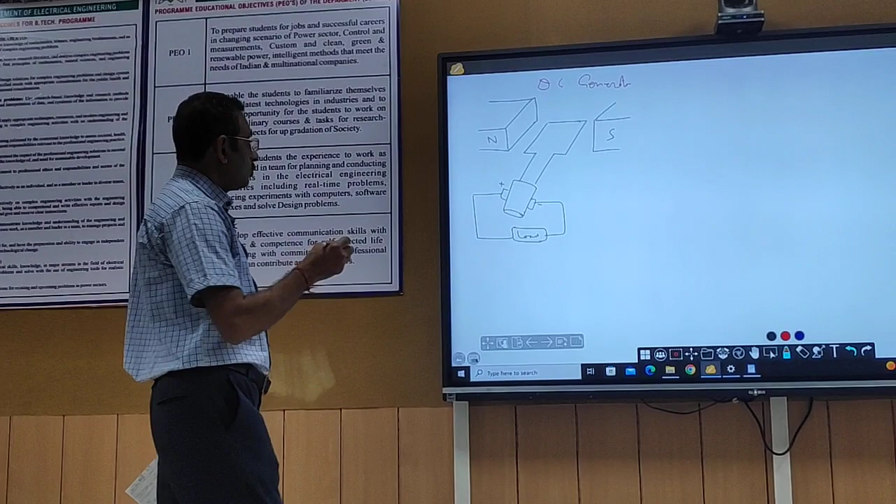In a transformer, change of flux takes place because of the nature of the supply. But here, change of flux takes place because of the rotation, mechanical involvement. So here, say there is a shaft. This is a shaft. On the shaft, this armature is rotating. Because of the rotation of this shaft, change of flux takes place.

This is a coil. In principle, we are saying this is one coil. This coil is like this. Here, this is a coil, one complete. There may be a number of turns, not only one turn. Say there are 10 turns like this, and two terminals are taken out.

So here, this is a north. Since it is a principle, we have shown North Pole and South Pole. The North Pole may be a permanent magnet. This can be an electromagnet. But anyway, when we see the construction, we will understand it in detail.

But just to understand the principle, let us say these are the two magnets, North Pole and South Pole, like this. This is North Pole, this is South Pole, and in this North Pole and South Pole, this coil is rotating. This coil is rotating like this.

So say it is a North Pole, it is a South Pole, and how much flux will be passing in this? See, this is a core like this. On this boundary there is a winding. Say this is a North Pole, and this is a South Pole. How much flux is passing into this? Some flux. Now like this, how much flux is passing through this? Zero. Which means maximum, minimum, maximum, minimum. So there is a rate of change of flux.

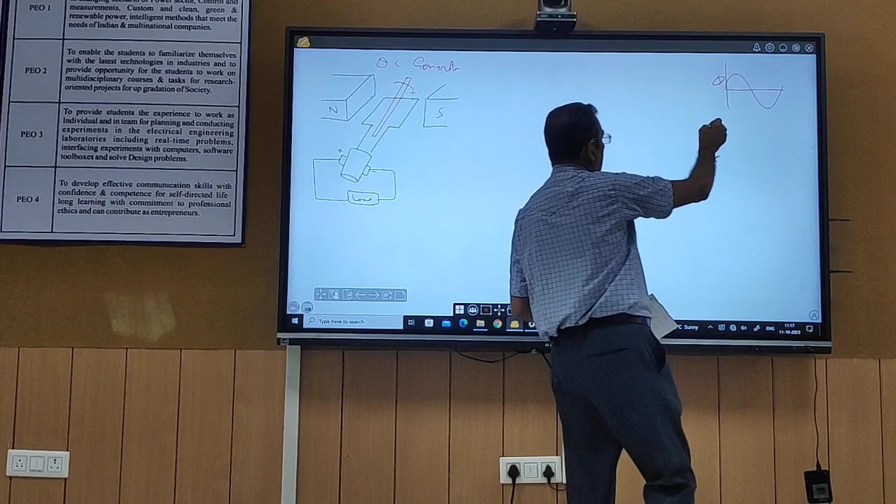If we write the equation for this flux, phi will be equal to phi m sin omega t. It is a flux. Now, how much induced EMF will be produced in this core, North Pole and South Pole, and it is rotating? At what speed is it rotating? Angular speed omega. Omega is the angular speed of rotation. So what will be the induced EMF?

How much will the induced EMF be? Rate of change of flux, d phi over dt. Okay? If it is one turn, d phi over dt; if the number of turns is n, then n d phi over dt. Let it be only one turn, so phi m sin omega t. What will the differentiation of sin omega t be? Cos omega t into omega. This much EMF will be produced.

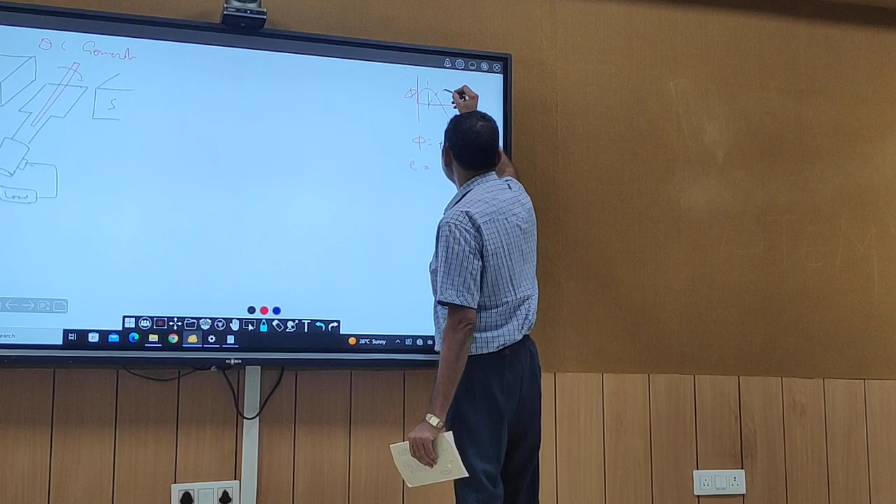So what does this mean? If phi is like this, sin omega t, then E is cos omega t, which means E will be 90 degrees out of phase. Is this one clear? So the EMF produced in the coil will be this. Now the same thing holds here.

Now you see, when this coil is rotating, as I told, this coil is like this. In this position, the flux passing is maximum. In this position, the flux passing is zero, and we are talking about induced EMF, which is d phi over dt, the rate of change of flux.

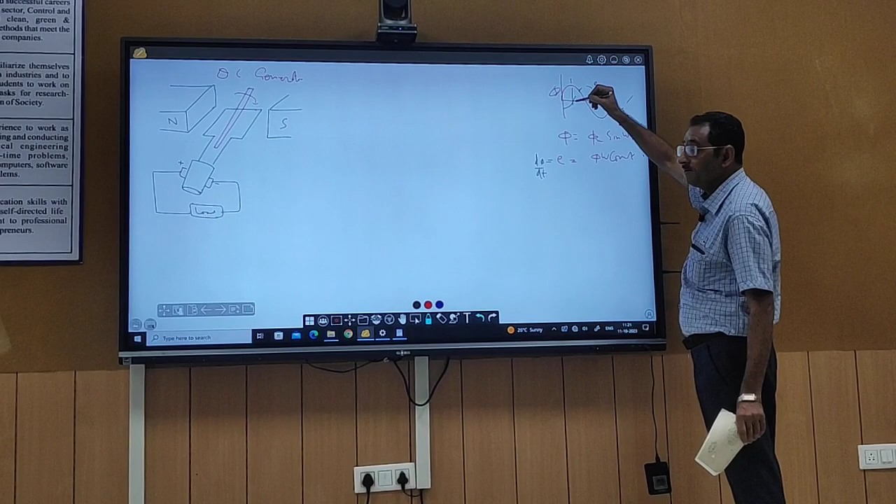So here, when the flux is maximum, EMF is minimum. Flux is minimum, EMF is maximum. Getting this point or not?

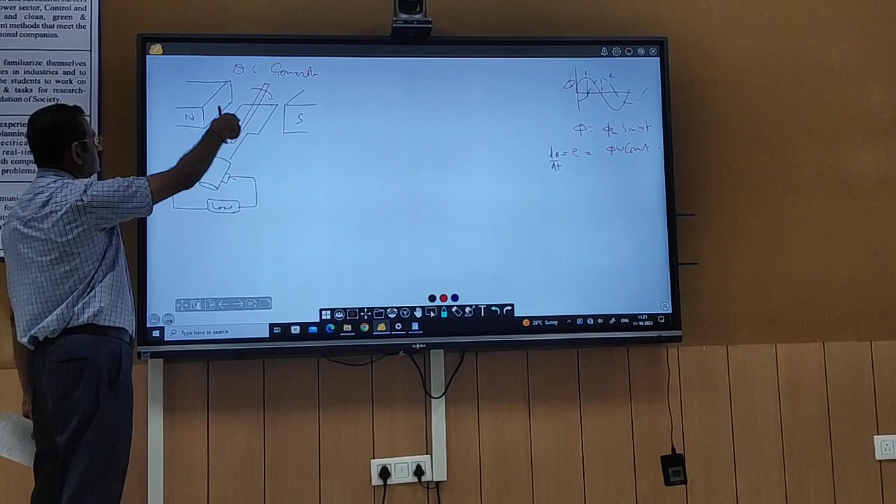Is this point clear? So here now you see, suppose in this position, when it is rotating with the help of this shaft, then the EMF will be produced. Now because of EMF, if load is connected, what will happen? Current will flow. What will be the direction of current?

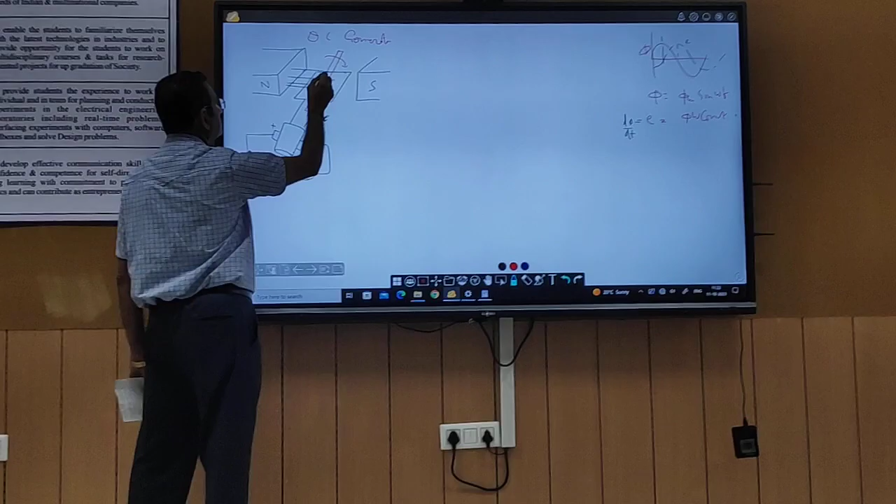Say this is the direction of field. Okay, this is the direction of flux. And this is the direction of rotation. Means when it is rotating, this is the direction of force.

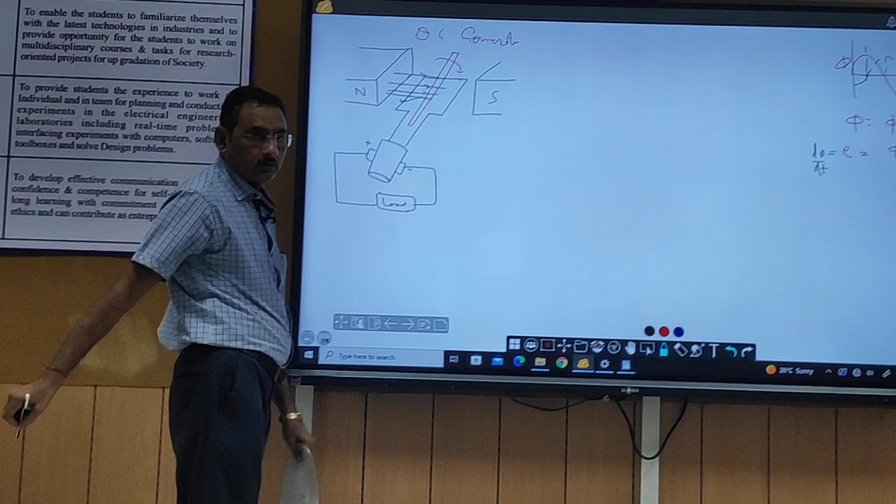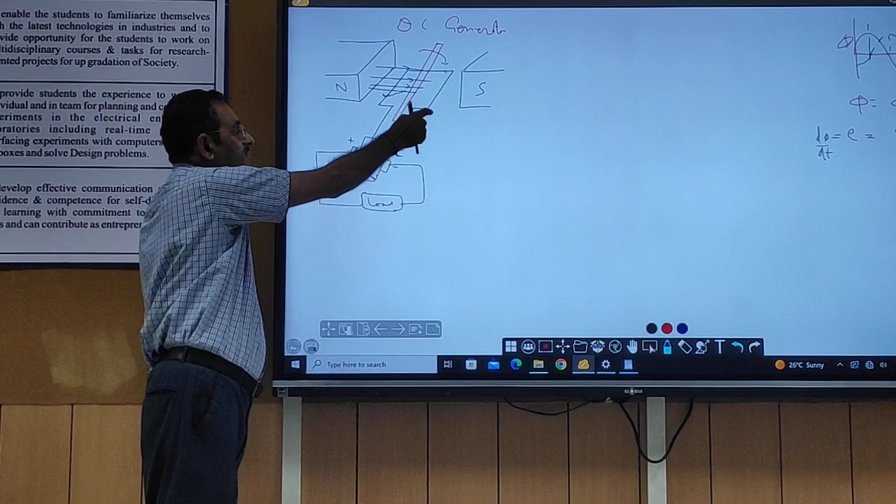Now when this coil is rotating, what will happen? After half rotation, this side will come here and this side will come here. In the rotation of half cycle, this slot will come here and this slot will come here. Is this point clear or not? Then this coil side, say it is A, B, and this is C, D. Then this CD will come to this side.

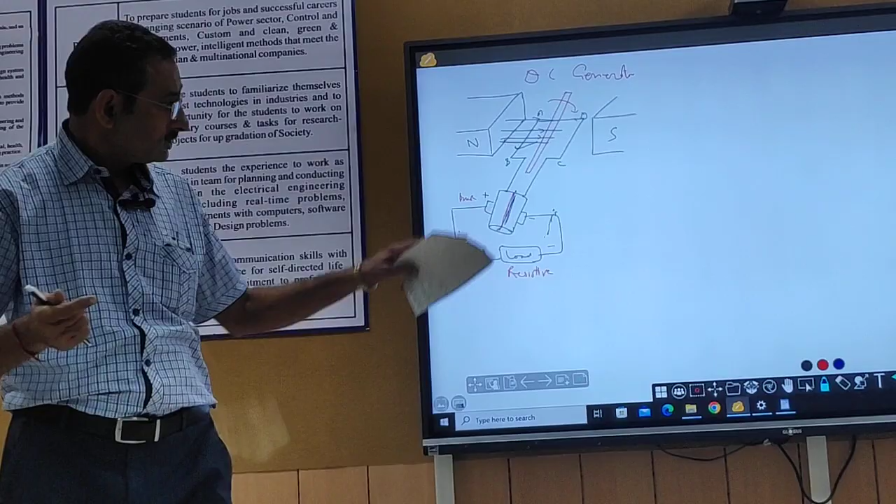If the direction of current changes after each half cycle, then it is AC. If it does not change, then it is DC. So it is a DC, but it is not a fixed one. Here we are getting a variable DC. Okay, so this is the point: we are getting the variable DC here, and we will see later how the better, perfect DC is made from here. Okay, now.

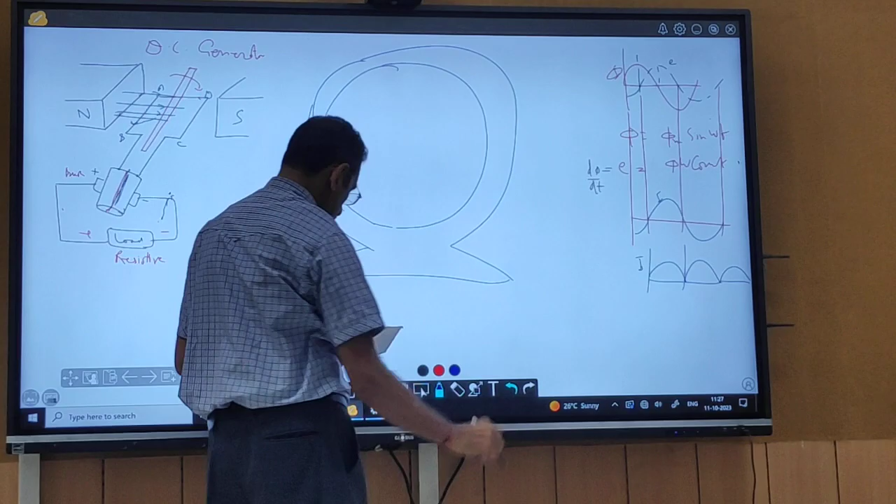Please listen here. This is only the principle of the machine. This is not the actual machine. As I told, since we will study the DC machine in detail, this principle is not sufficient. We have to understand the construction of the machine also.

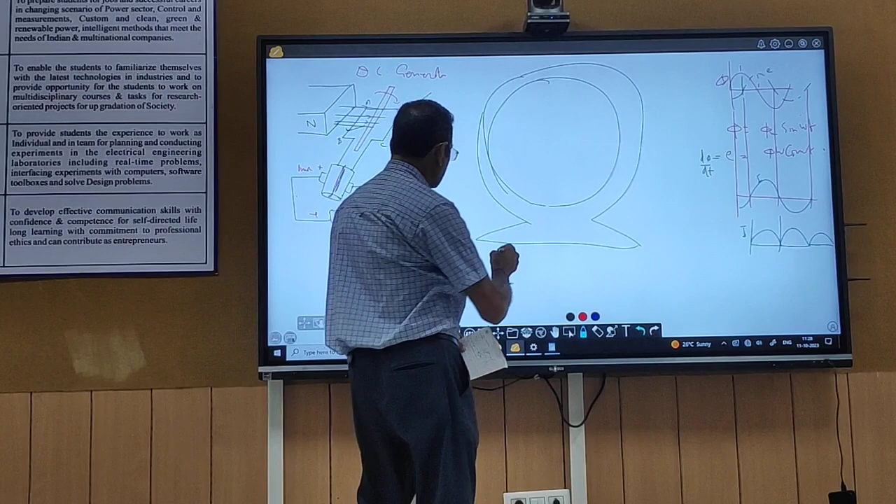In fact, when we are saying these two permanent magnets, these are not only two; there can be a number of poles. In the DC machine, there can be a 4-pole machine, a 6-pole machine, a 2-pole machine, an 8-pole machine. So a number of poles can be there. And this is the outer body. Please listen, this is the outer body. This is called the yoke.

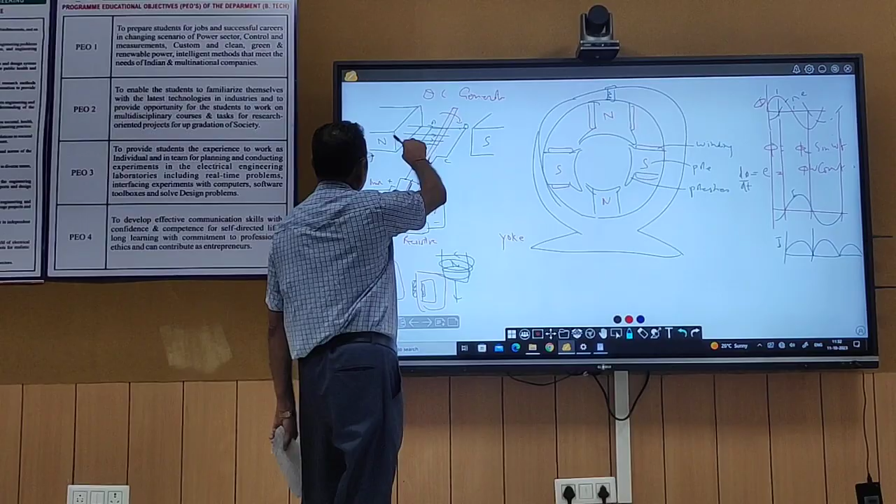So this is called the field, and field winding along with everything, this is producing the field. Now this winding or the coil, this coil in the DC machine, coil is not like, एक ऐसा बता दिया coil ऐसा था, ऐसा नहीं होता. The coil is not like this. In fact the shaft is like this.

देखिए shaft ऐसा होता है. ठीक है. इसके ऊपर हमारा आर्मेचर है. Armature is, say this is a shaft, this is an armature. On the armature there is not a coil, there are number of turns, number of slots. तो इसमें, इसके अंदर

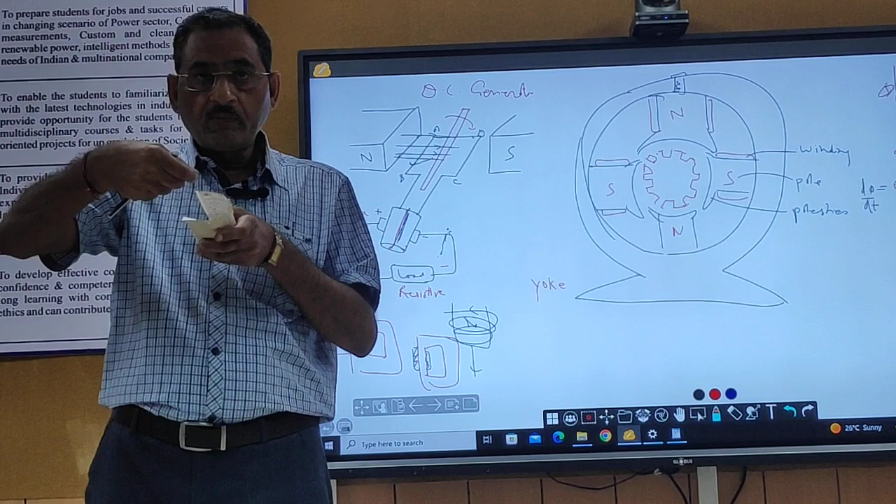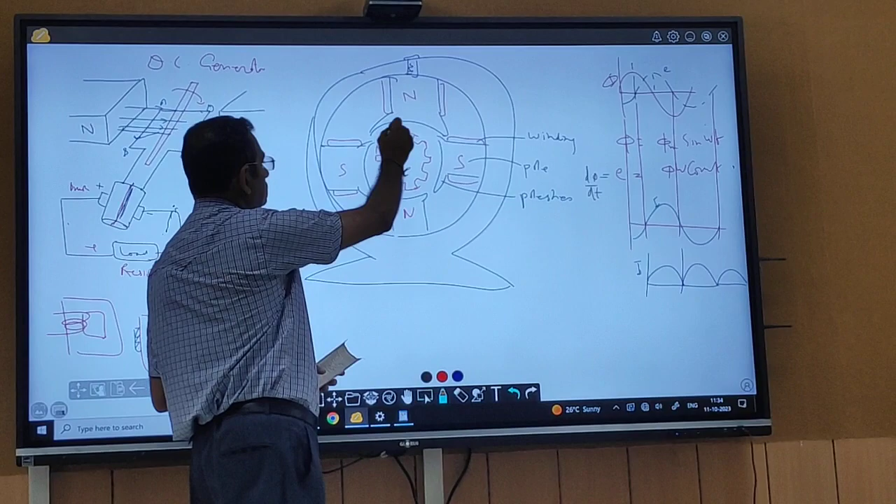So इसमें, तो this is called the armature band. This is called the armature, or in fact this is called the rotor. And inside this there is a winding called the armature winding. This winding is called the armature winding. Armature winding and rotor along with the armature winding is called an armature.

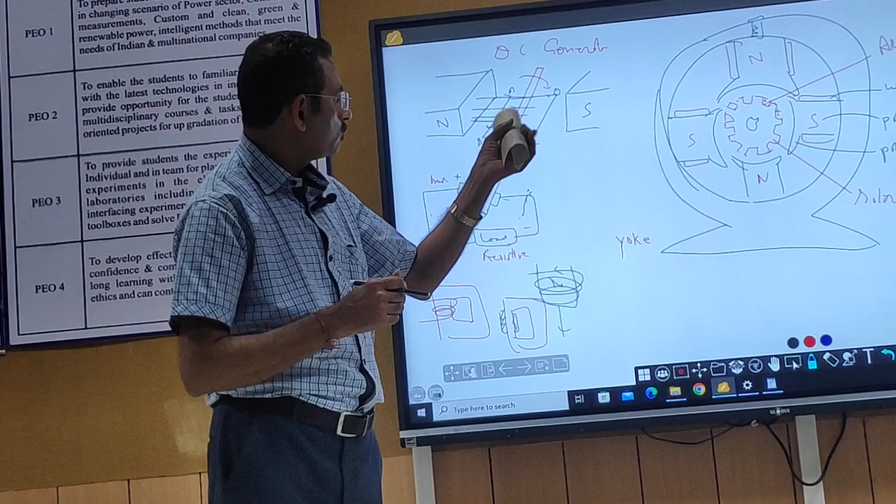When we see the front view, this will be shown. If you see the front view, it is a circle. If you see the side view, like this is there. Okay, so we are showing the front view, and in the front view there is a shaft. Inside the shaft there is a groove like this. Here it is groove. Okay, and here you see there is a commutator.

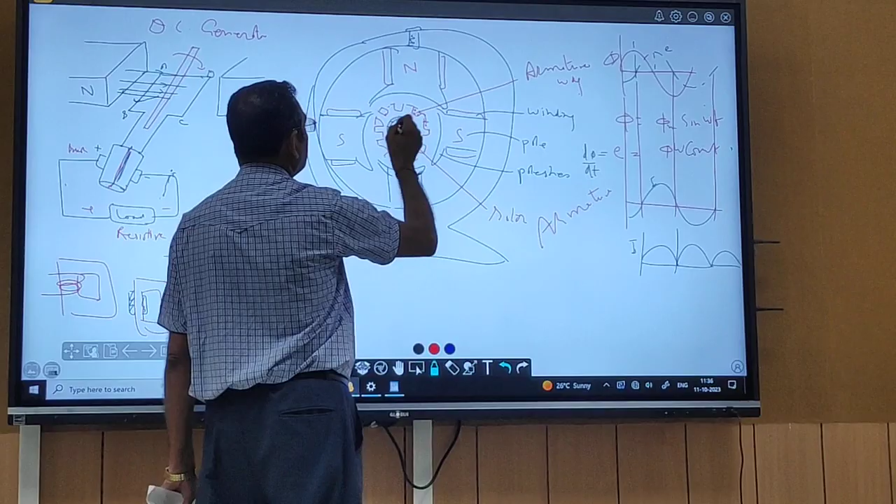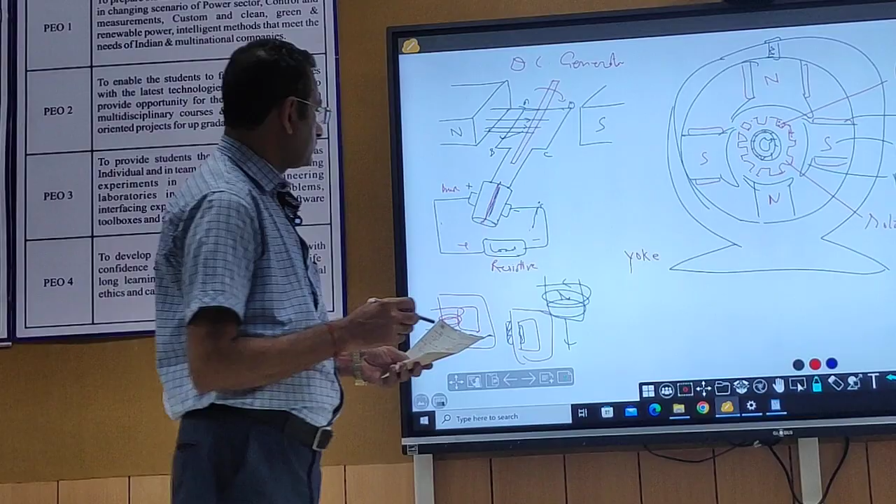This is the front view of DC machine. This is the principle of DC machine. Okay, यहां तक अगर किसी को कुछ पूछना है, then you can ask. If you want to ask anything up to now.

Rate of change of flux is high when flux is low. सर वो दोबारा बता दो। हाँ, दोबारा पूछो। So you have repeated line, rate of change of flux is high when flux is low. Please repeat it again.

देखिए, please listen. This is a north pole, okay, and this is a south pole like this. दिख रहा है? Are you? This is a north pole. This is a south pole.

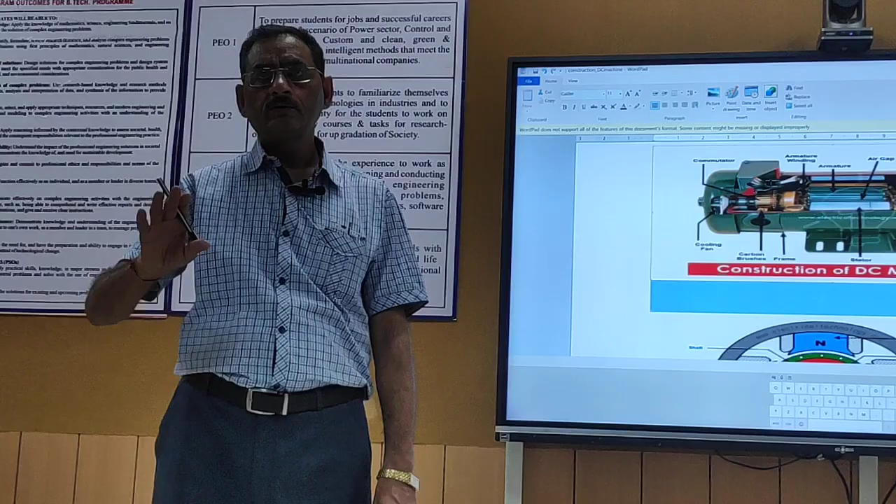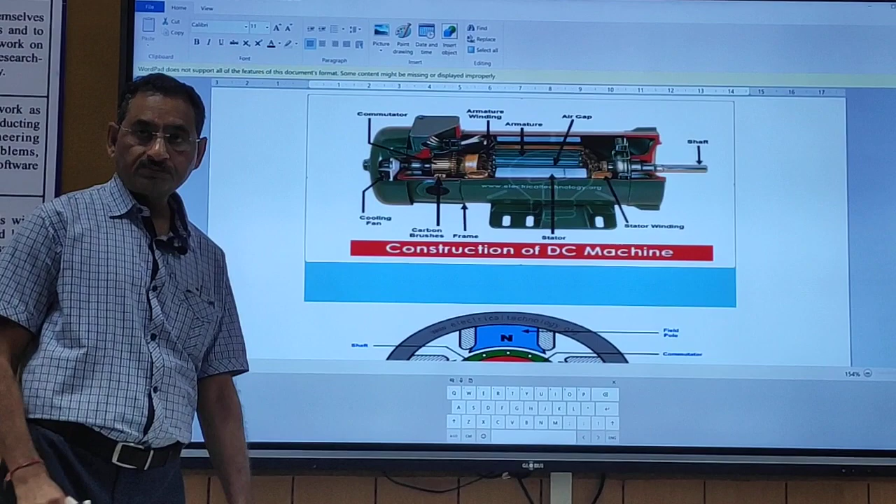We have described the basic principle of the machine, we have described the construction of the machine. The actual picture of the machine is shown here. This is the DC machine. In fact, you can see the detail of this armature winding here. You see, this is the armature winding.

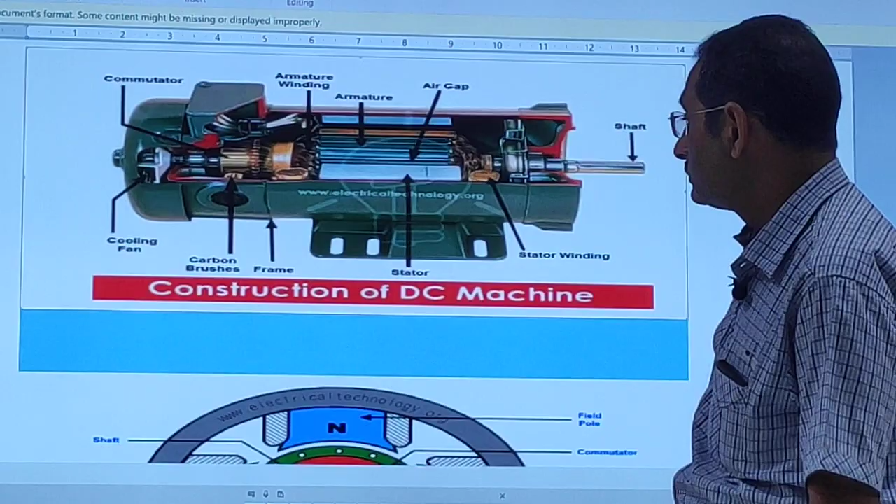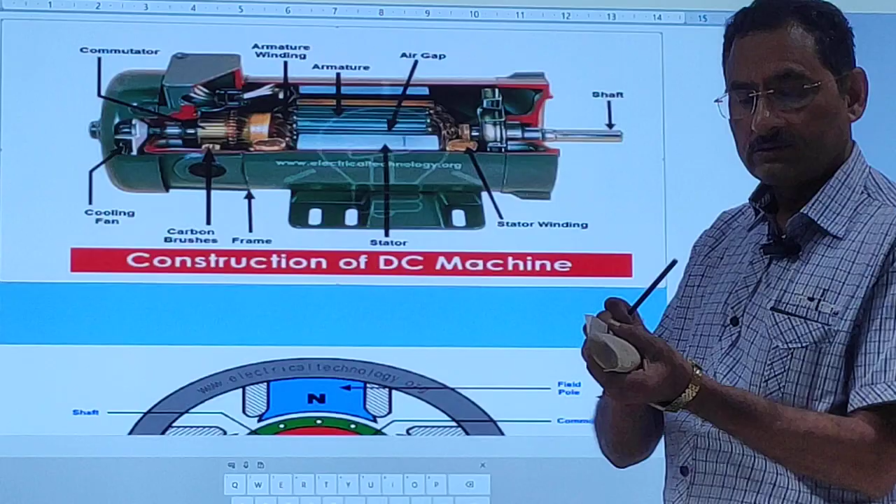This is the carbon brushes. This is the commutator. Here, see, this is the armature and these are the slots. As I was telling you, this is the armature rotor. Above this there are slots, and in the slot there is a winding. And this is the shaft.

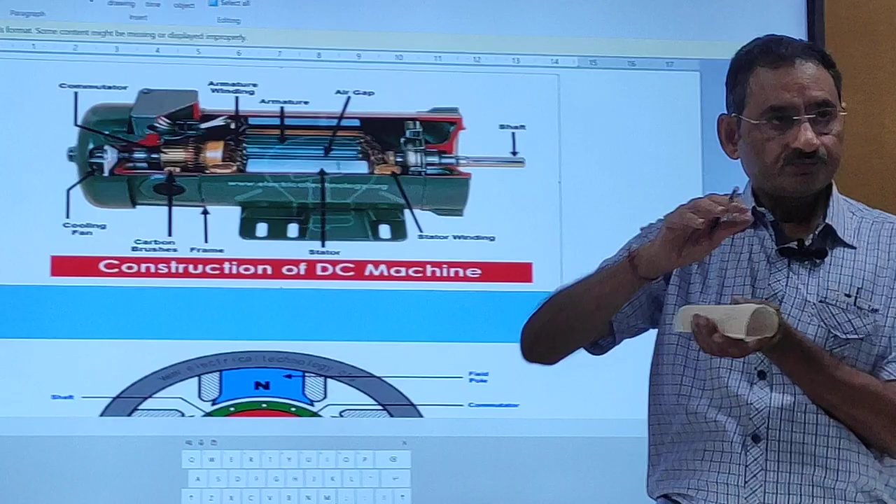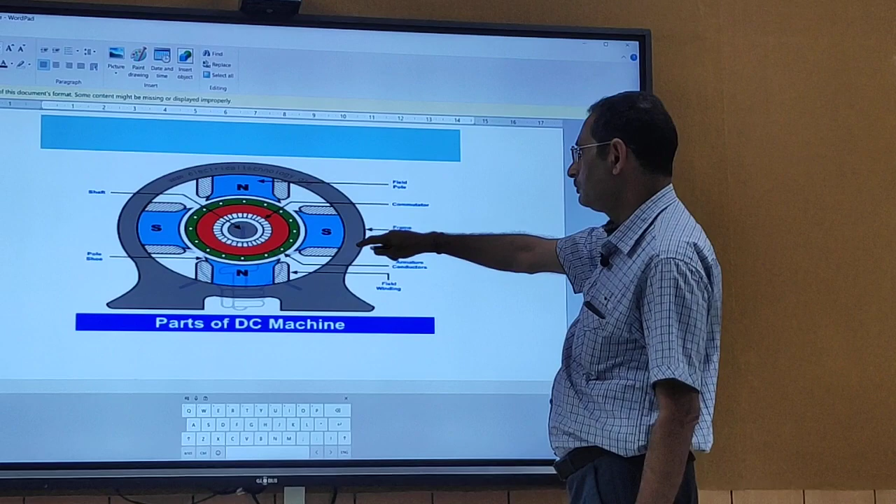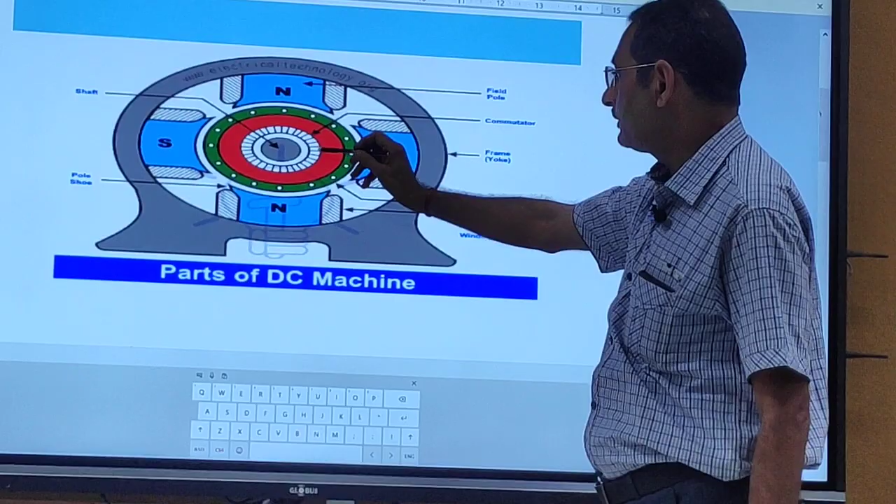This is the yoke outside, and between the poles and armature there is an air gap. If you see the front view, it is like this: north pole, south pole, north pole, and here this is the commutator, this is the shaft, this is the armature, these are the windings, these are the poles, these are the field windings, as we have described.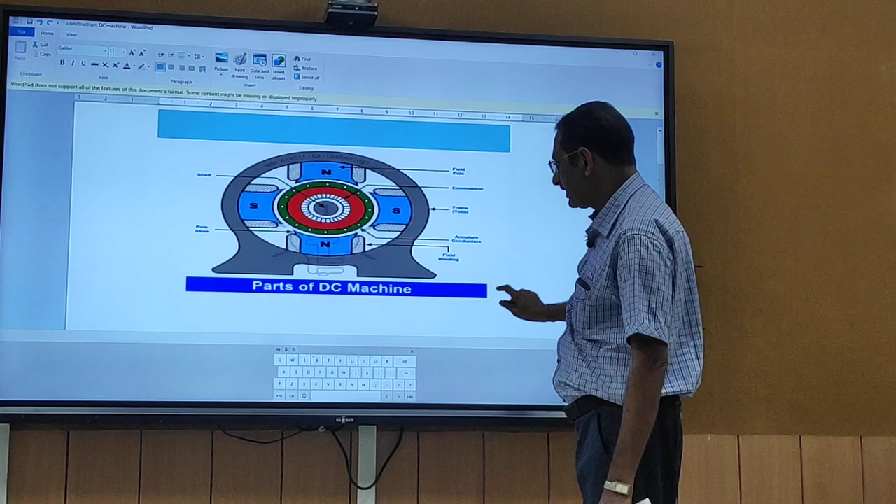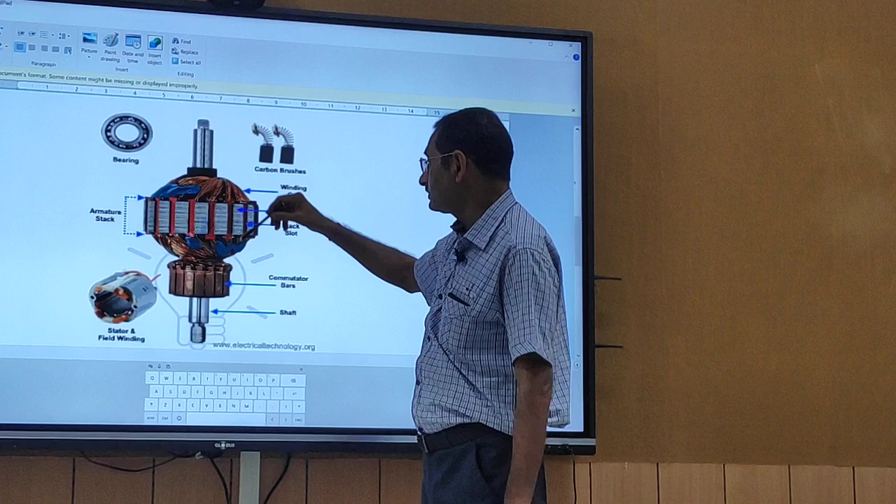Now this is the detail of the armature. We have shown there is one coil, but the actual winding is not one coil. It has coils like this. This is the armature, and inside this, these are the windings.

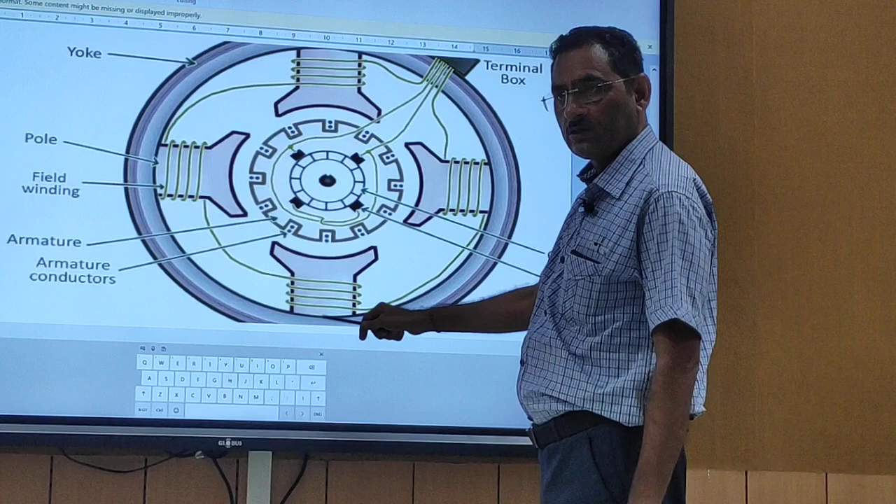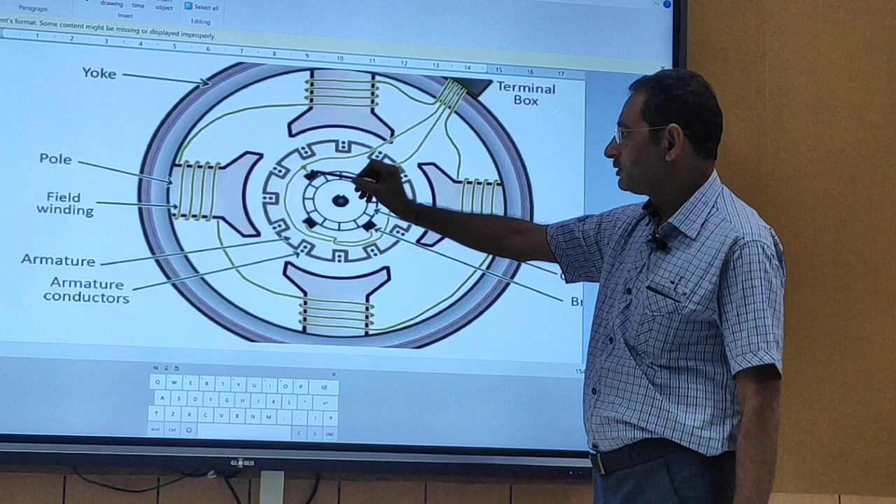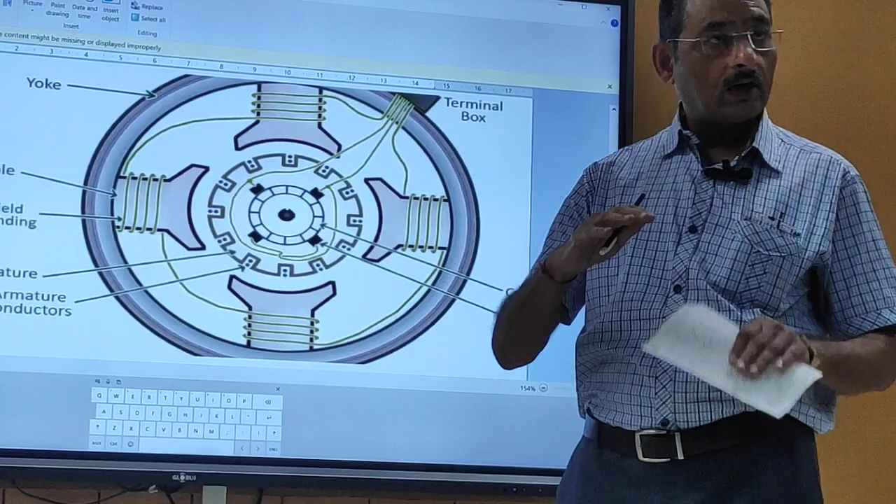There can always be two brushes or there can be four brushes depending upon the type of winding. We will describe the various types of winding.

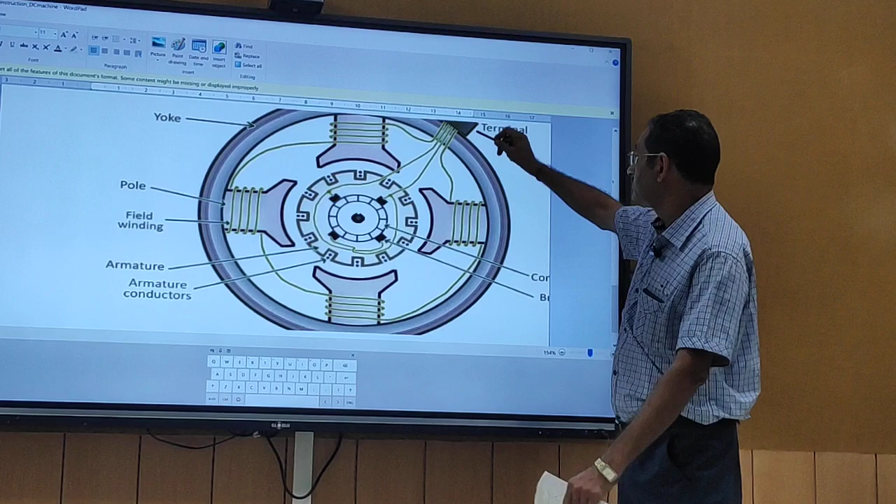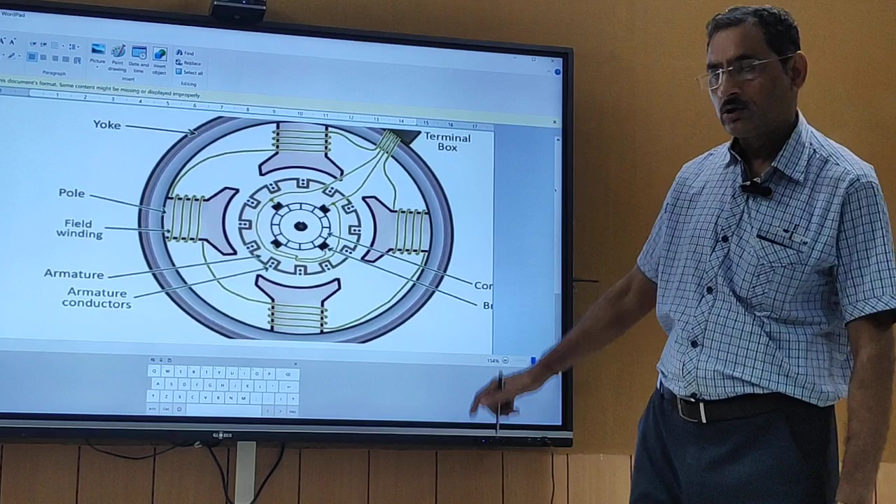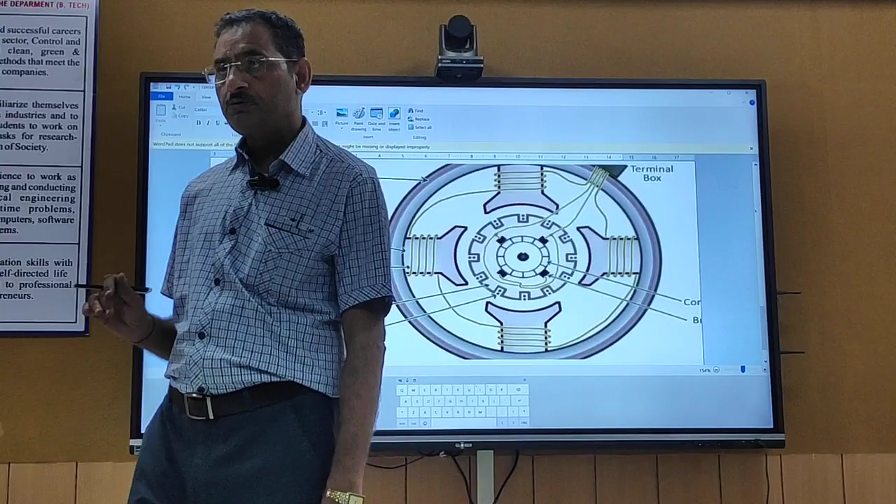So you have seen the construction of this machine. We have described the principle of the machine. In the next class we will describe how much EMF will be induced. So far we have seen there is only one coil.

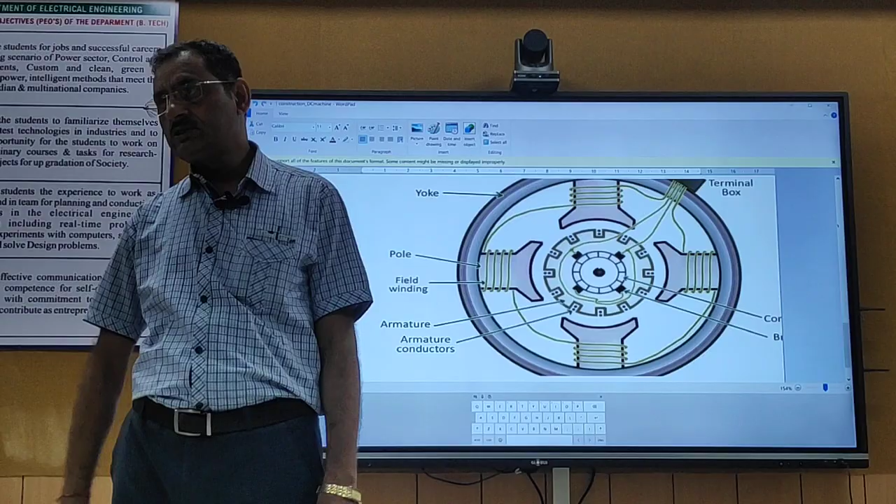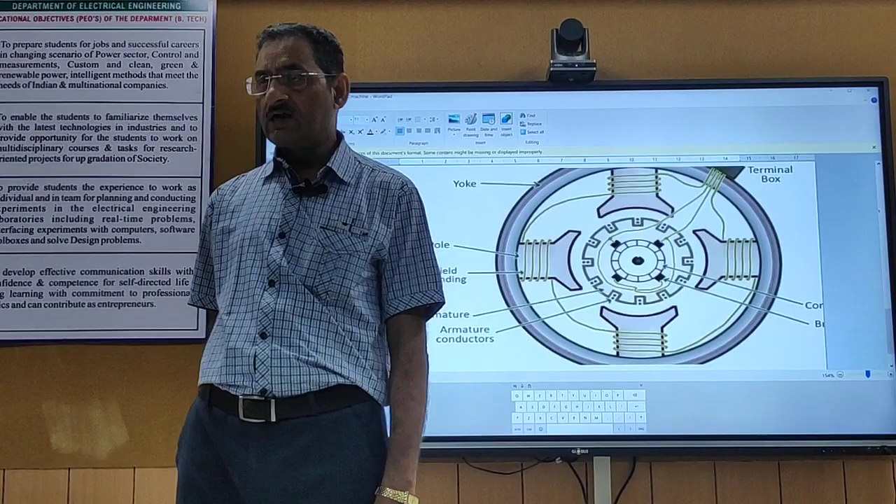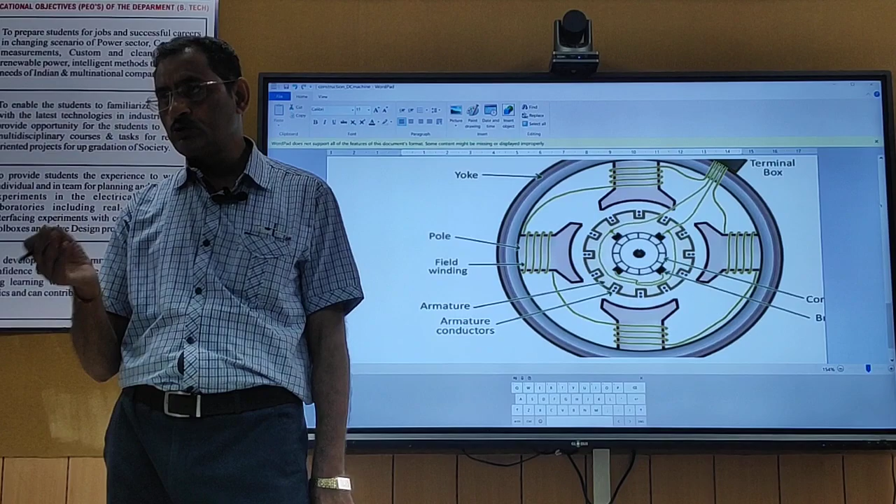Then we described phi is equal to phi m sin omega t, and e is equal to d phi over dt. But in fact there is a regular winding, and the EMF produced depends on the type of winding. We will see the actual winding and the actual EMF produced in the machine in later classes. Is there any question up to now?